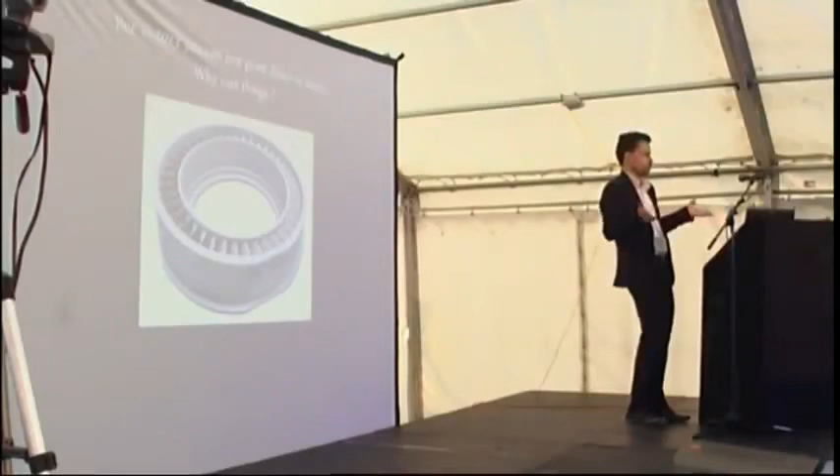These days things are very advanced, and in fact you can 3D print with a laser. You can direct print parts in metal anyway, so you can nowadays completely skip out casting things, and just go from a CAD model to a laser sintered metal part in one step. You can make turbine blades, which in a very short period of time will render more or less the entire casting industry completely defunct, but that's another talk.

So what we're going to talk about now is a quick overview of the casting process. What is it, the equipment required, what bits do you need to buy, making the pattern, assembling it, pouring the mould, pouring the metal in, getting your casting out, and some general rules for how to make castings that aren't full of holes and fall to bits. If I've got time, we'll look a little bit at some simulation things you can do with open source software, and hopefully some questions at the end as well.

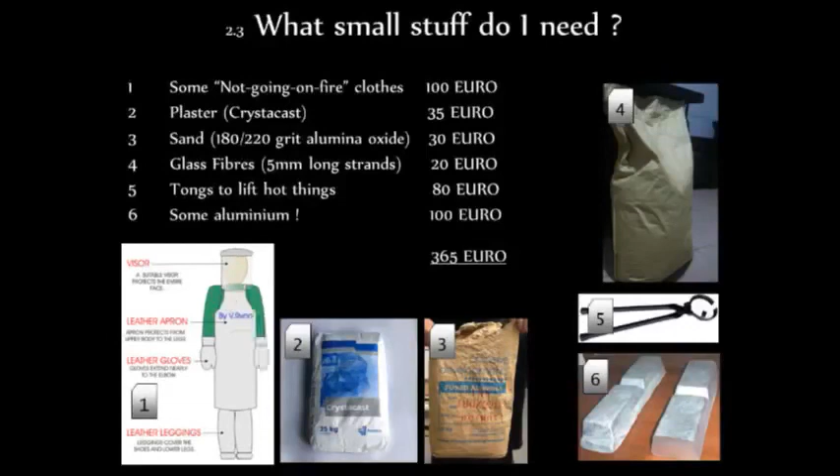So the three ingredients for the mould are plaster of Paris, sandblasting grit, and some glass fibres. The sand stops the plaster from shattering at high temperature, and the glass fibres mean that if you get a little hairline crack, it doesn't open, so the mould stays in one piece. If you're making a big mould, you need some of that in it. All of these things cost £20 for a 30 kilo bag or something. It's not expensive.

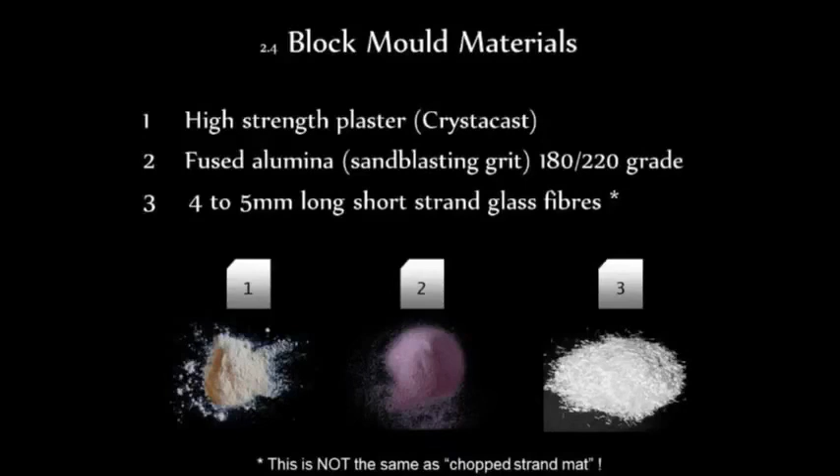This can be a bit tricky for a lot of people because unfortunately in the open source software scene, CAD is one aspect in which it's sorely lacking, which is basically drawing things on the computer. Unfortunately, there are not really any very good open source free CAD packages yet, though there are some you can use. If you can use Google SketchUp, you could just draw something you want, and then use that to make the 3D print, and then make a casting from it. But you're a bit limited with the geometry you can use there. But if you have a CAD model, you can make the casting.

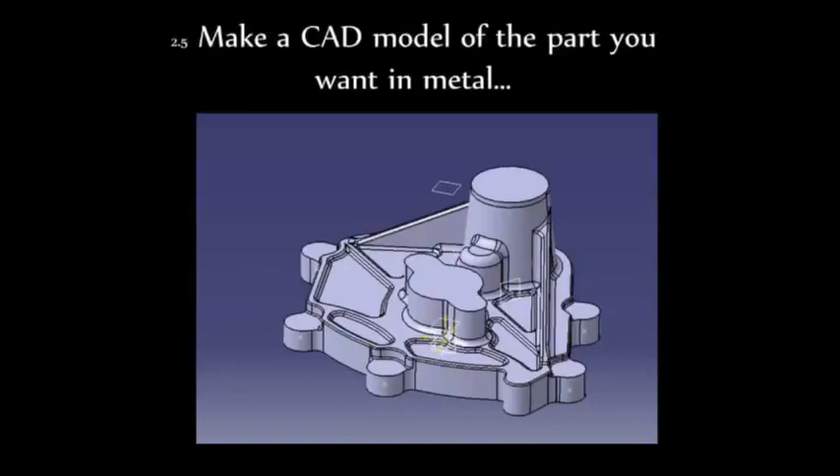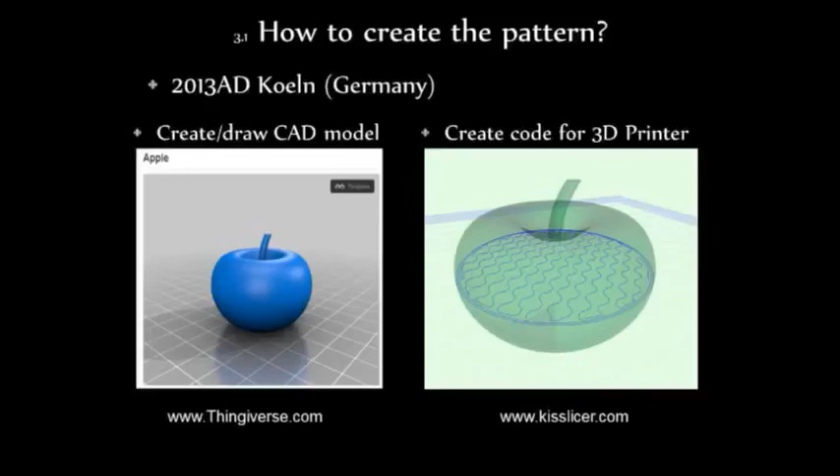But if we did want to make an apple - excuse the date, I gave this talk in Germany last year, so it's still got some references there - you'd find a CAD model or draw a CAD model of your apple, create the 3D printing code to print it, 3D print your apple, this is my 3D printed apple, and then we can cast it.

So what I'll talk about a little bit is how to design your mold, because you need a way of putting the liquid metal into the casting. What most people do is just put a kind of funnel on top and pour it all in, which is the worst possible way you can make a metal casting. Don't ever do that. The metal should always go in from the bottom up. You should never, ever pour it down from the top.

So this is essentially a kind of baseline you could follow to design your mold. The reason we do it like this is if you pour it in the top, the metal splats and kind of falls down and bounces off other bits. And if you've ever made hot chocolate, you know, if you let it sit there for a minute, you'll get this horrible skin on the top and you have to throw it off.

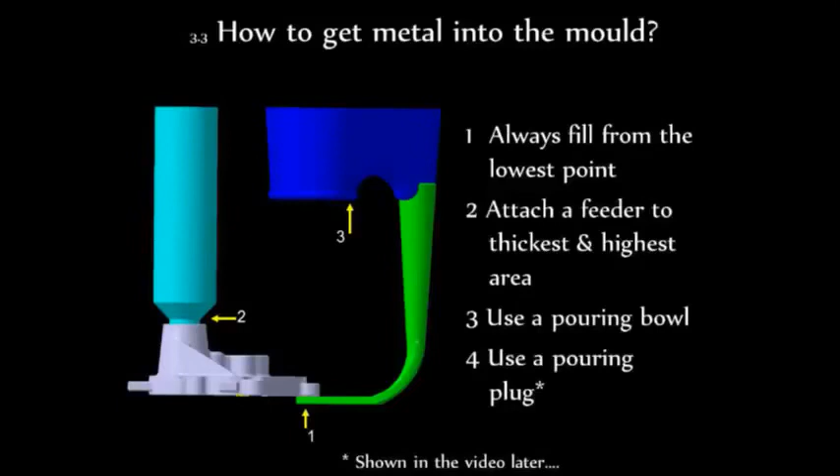Basically, when aluminium is liquid, it's forming a skin on it. Every time a bit of it is exposed to the atmosphere, it forms a skin, which is basically a bit of rubbish - it's not metal, it's oxide. So every time it splashes, lots of little bubbles get covered in air and form a skin. So if you pour your metal in just straight from the top, you're guaranteed to have complete rubbish parts that are full of bits of air and oxide and all sorts of stuff.

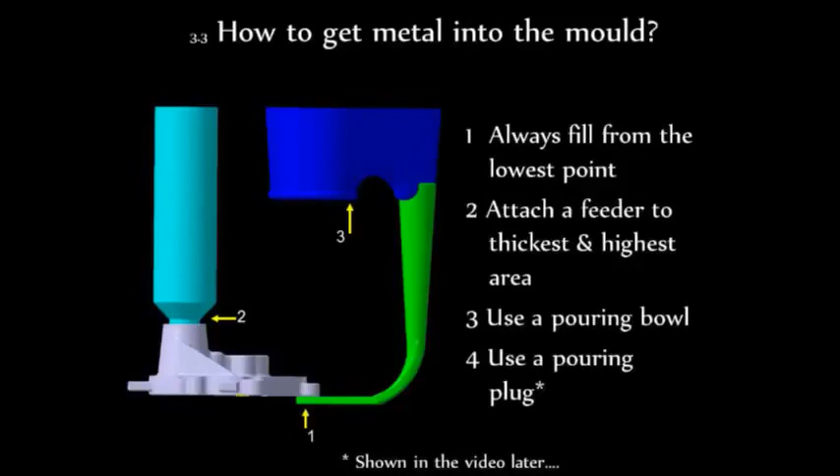So basically you want to pour it into the dark blue bit, it flows down the green bit into the bottom. So the thing I want from the casting, that's the bit I want. I'm going to pour the metal in here, it's going to flow down here and rise up like that. So that's kind of the rough shape you want to try and have.

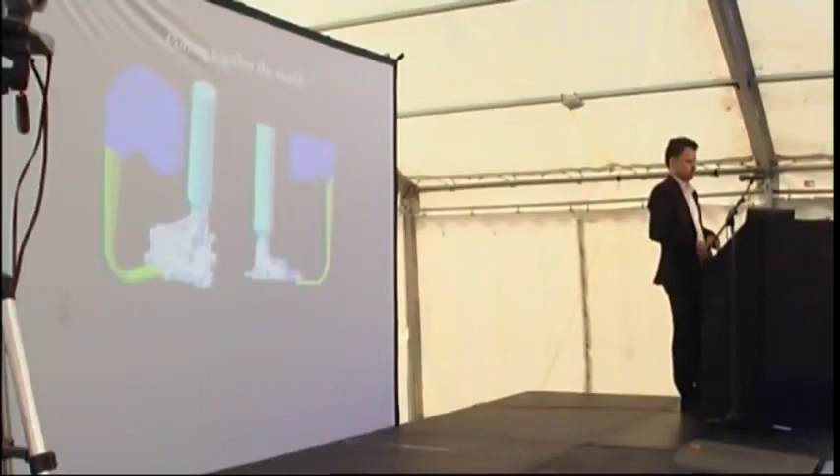So I've 3D printed all these parts on my 3D printer at home and glued them together with super glue, which is that there. So that's all these parts just super glued together basically, and put into a box. I've tried to be quite clever with this box, but you don't need to do that. You could literally just use a biscuit tin. It doesn't matter, it's just something that you can pour your plaster into. It doesn't leak out the bottom. That's all you need.

So this is my pouring bowl. I'm going to pour the liquid metal in here, down here, and that's going to fill up like that. So in this case, this is my finished box. As I say, you don't need a clever box like this, you can just use any kind of tin, doesn't matter.

So I've now mixed up the plaster mix, which is just the plaster of Paris with some sand, some glass fibre and some water. Mix it up until it's quite thick, pour it in, and then you leave it for about an hour, and then it's set. So then what you have is a set block of plaster of Paris with inside it's got your plastic 3D printed part stuck in the middle of it. That's what you've got at that point.

So what I do now is I leave that for an hour until it's set, and then I put that in an oven, or if you've got your propane burner or whatever, you can just put it inside that for a few hours, and basically the 3D printed plastic will completely vaporize. So I heated it to 600, but anything above about 450 degrees will completely vaporize the plastic. And PLA is basically made from cornstarch, so it doesn't give off very toxic fumes. It basically just decomposes into carbon dioxide and a little bit of carbon monoxide.

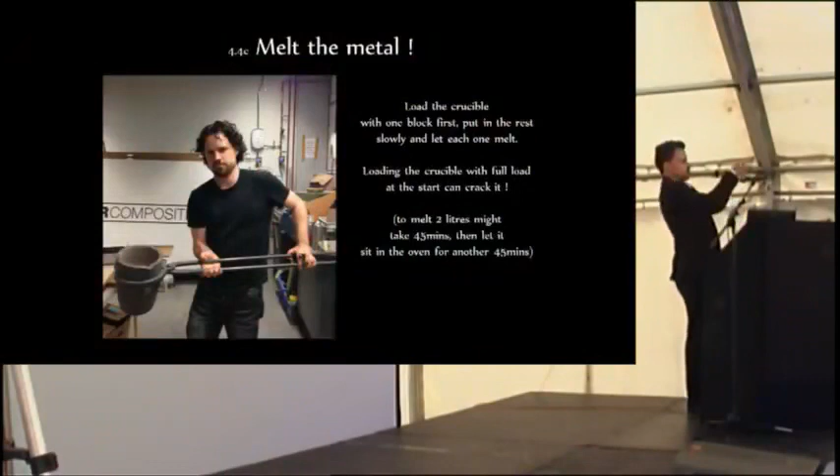You'll read lots of stuff about how you prepare the metal. The best thing to do is don't put any kind of treatment stuff in it. Just melt it and leave it being melted for about 45 minutes. Basically what happens is all the rubbish kind of just floats very slowly up to the top. So do not stir it, that's the worst possible thing you can do. You just leave it until its stuff's floated up to the top, scoop off the bit at the top, and then you're good to go. Don't stir it, that's the worst thing you can do.

Now, if you've listened to the first part of the presentation, you've bought yourself a thermocouple reader with a thermocouple, so you stuff that in and you check how hot the metal is. If it's the wrong temperature, it won't cast very well. Basically, you should heat it to about 720 degrees. If you heat it much hotter than that, it'll take a really long time to cool down, and you'll end up with a rubbish casting because it'll be oxidizing all the time it's hot. And if it's not hot enough, it'll solidify while it's pouring in, so you'll get your casting and find you've only got about half of it because the metal's gone solid before it's flowed in. So that's why you want to check how hot it is.

So I'll show you now a quick video.

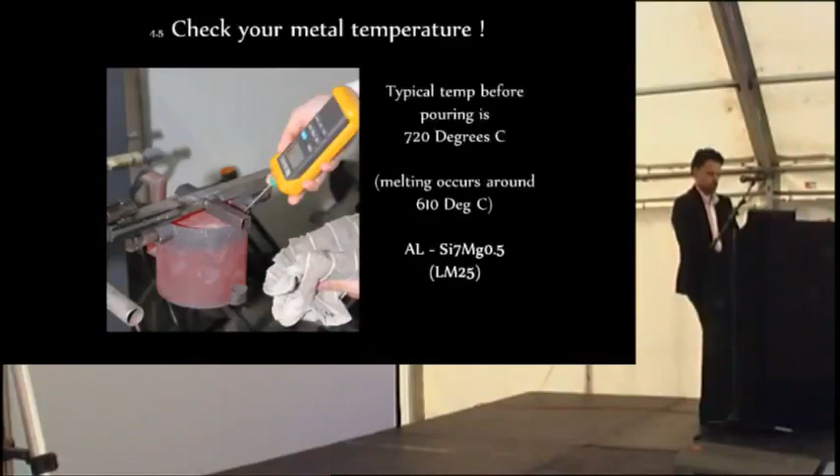Hope this works. Really? Seriously? Help? Yeah, I desperately need assistance here. It's all gone wrong.

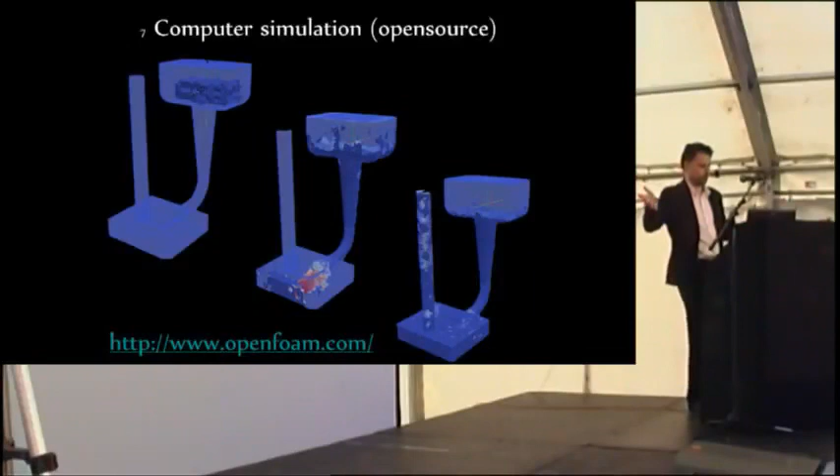I've got a website, and I've put most of the information you've just seen on there, so you can find it. Ultimaker, that's the 3D printer I've got. The Complete Casting Handbook, that's the only casting book I've read that's actually any good. KISSlicer is free software to generate the code for the 3D printer, turning your CAD file into G-code. It's the best one, I think.

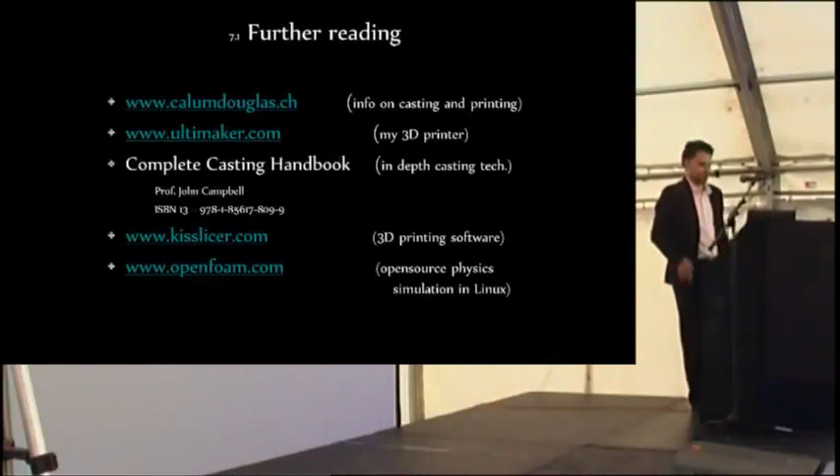And that's about it. I've obviously had to rush a lot, but I thought it's best to give an overview, and then if you have detailed questions, you can ask them now, or look at the website, or come speak to me afterwards - follow me home, whatever works for you. So I hope that was instructive, and I hope someone's got some questions, because if you don't, you weren't paying attention.